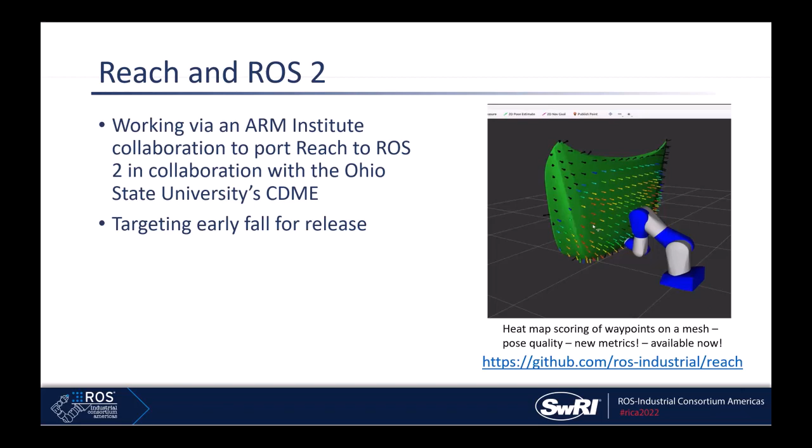So stay tuned. Another exciting tidbit of news is for those who are familiar with robotic blending over the years, we're excited to say we've got another round of robotic blending going, milestone 5. Just kicked off March 28th. We will be hosting a couple different integration events. The cool thing is we're going to be taking the prior repo, Godel that's referenced, pulling all the goodness from Godel, modernizing that whole scan and plan implementation, merging with the scan and plan workshop, to create something more contemporary and new in ROS 2, and ideally we'll have a couple replications left behind. So a number of our different collaboration partners will have the latest and greatest in how to execute scan and plan processes based on this.

Shout out to Steel Founders Society of America. They're the champions and primary funders of this initiative. But we have a number of different members, universities, and in-kind collaboration partners involved. Pretty exciting, happy to see that, and the benefits to the overall number of different repositories in the ROS industrial ecosystem. So we're pretty excited to see that. That's kind of the latest relative to collaborative developments and some different events and activities coming on.

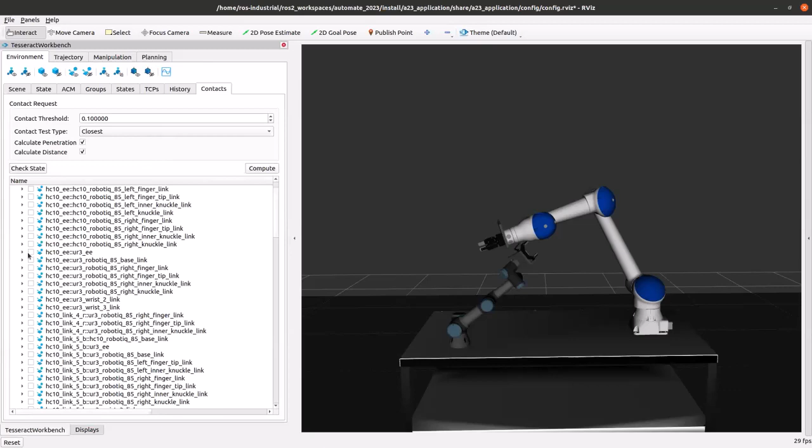And then one of the cool things you can do is actually do a contact check. So you can use the Tesseract contact checker live, and then you can see all the contact results. So I can see like between the HC10 and the UR3, and you click on it, it actually shows you the contact, and if you drag this out, it'll actually tell you how far apart they are.

This can be super useful for debugging various things. I was just using this for debugging some of my allowed collision stuff. But anyway, yeah, and then you can look at the collision objects like you would expect, all of the bounding boxes of things, and then all of the frames. This is all just in Tesseract, it's not using the TF frames or anything like that.

And then another really cool feature is the trajectory viewer. So you can store up a bunch of trajectories, and then actually -- whoops, I gotta turn this on.

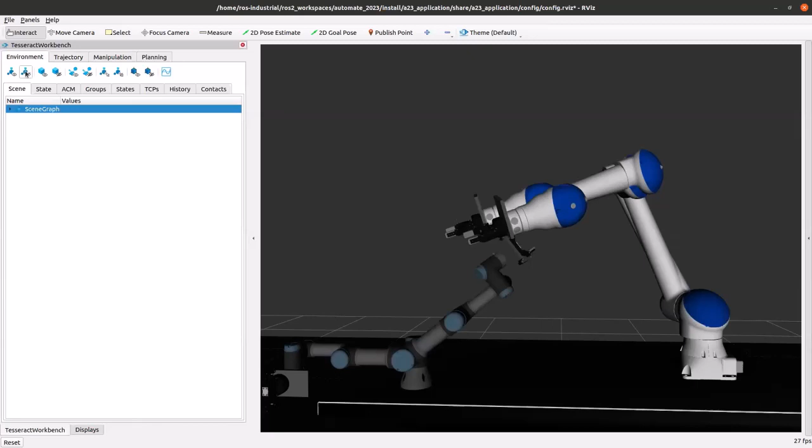So I'll hide the previous environment, and then you can visualize and watch the trajectory move around. In this case, we see the HC10 planning around the UR right there.

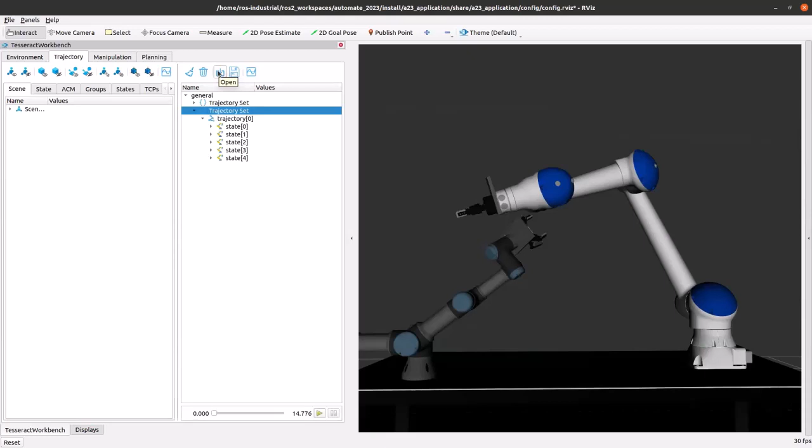A nice handy thing you can do is go in and look at each individual state, all the joint positions, joint names, positions, velocities, timestamp. You can also view a plot of it, showing position, velocity, and acceleration over time.

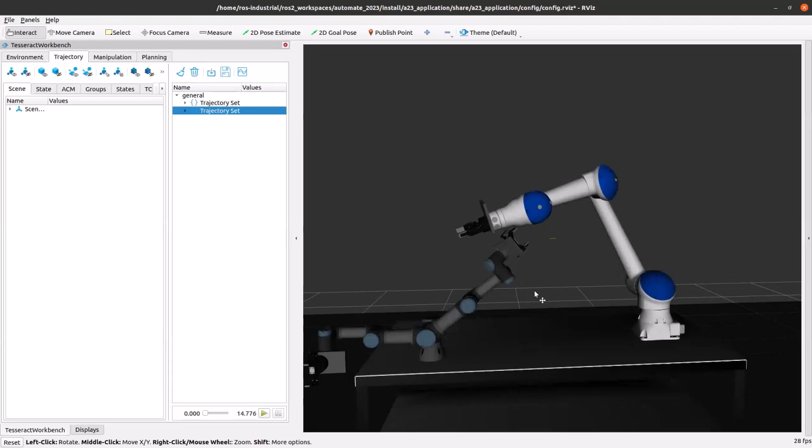And then you can save these trajectories and load in other trajectories. In theory, you can have this Tesseract environment pulled up, and as long as you know about the URDF, you could load in a trajectory from somewhere else. I could save off this trajectory and send it to somebody else working on this project, and they can load it up and step through it all the same.

Right now those files are pretty big because they contain all of the Tesseract environment history, and it's all just serialized. So they can be pretty big files, but they're pretty handy.

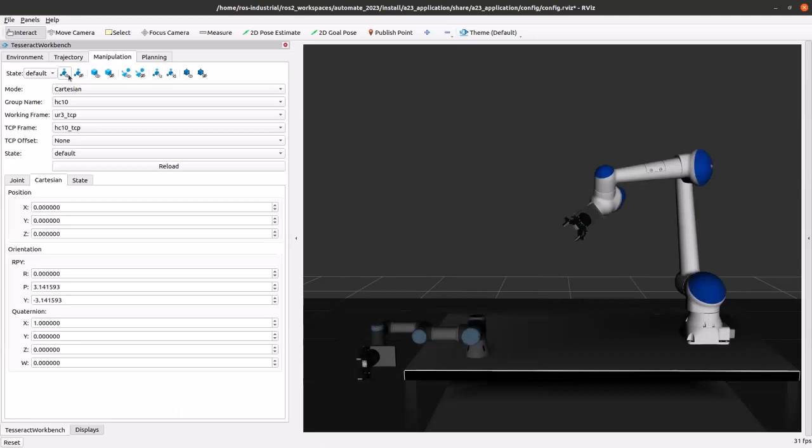There's also this manipulation widget, which you can use to move the different robots around, in Cartesian or joint mode, specifying which manipulator group you want to use and your working frame. In this instance, I specified the working frame as the UR3 TCP, which is right in the center here, and my TCP frame as the HC10 TCP, also right in the center. I set the position to be exactly on top of it with a rotation around it.

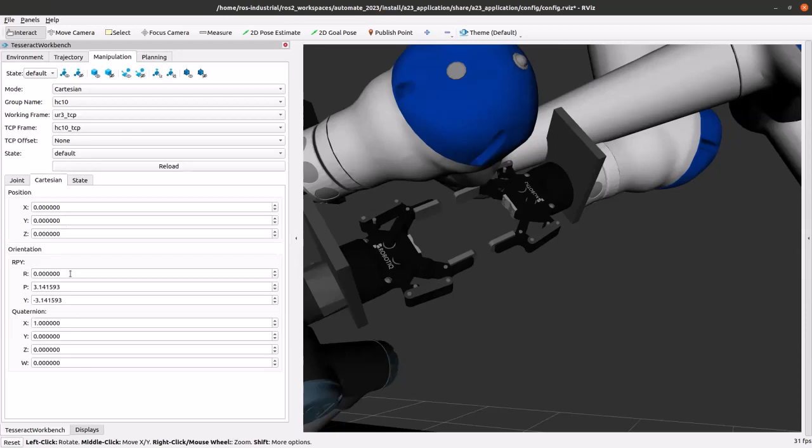But I could make this working frame anything, make it the table, and then change the Z value to be 0.2, and it shows you the IK solution, which can be helpful for debugging things. But yeah, in general, that's the Tesseract widget for those unfamiliar.

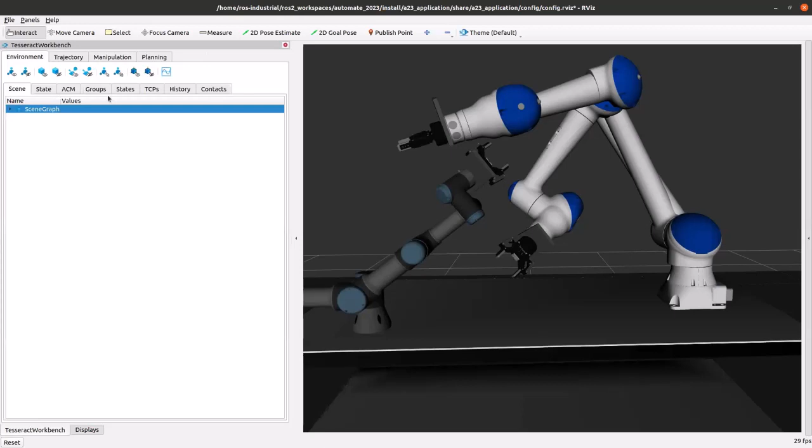And yeah, this is all available in ROS-2 now. I will say that there does seem to be some rare, but it does happen, crashing right now. Some of the latest updates in the Tesseract Qt backend might be contributing to this. We're still working through that, but I've been using it pretty reliably without too much issue.

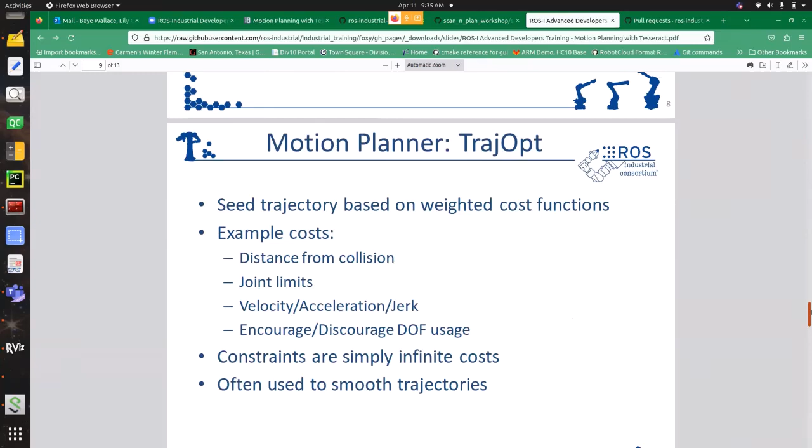We're going to go through this content, review some of the types of why we're going to do this sort of pipeline construction. Then we'll build a task flow like this, where we're just streamlining and adding additional constraints to a free space motion in order to make it have clean and consistent behavior.

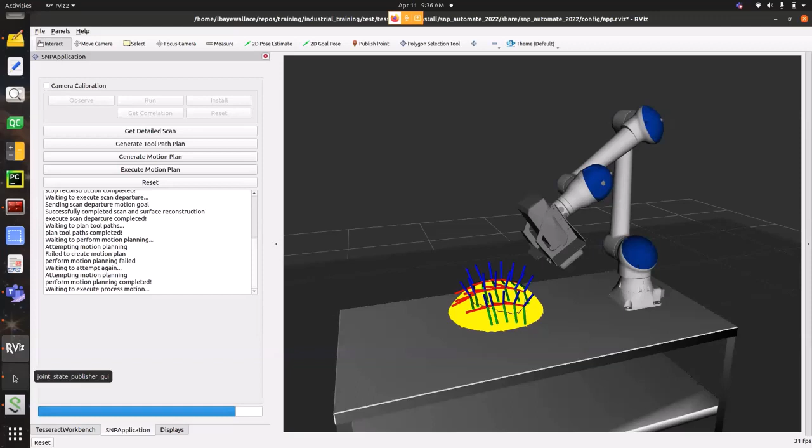I can go ahead and show you real quick what this is going to look like for us when you're getting towards the tail end of running through this demonstration. We've got this lovely setup. This is really comparable, again, if you saw us at Automate last year. You saw this HC10 on a table.

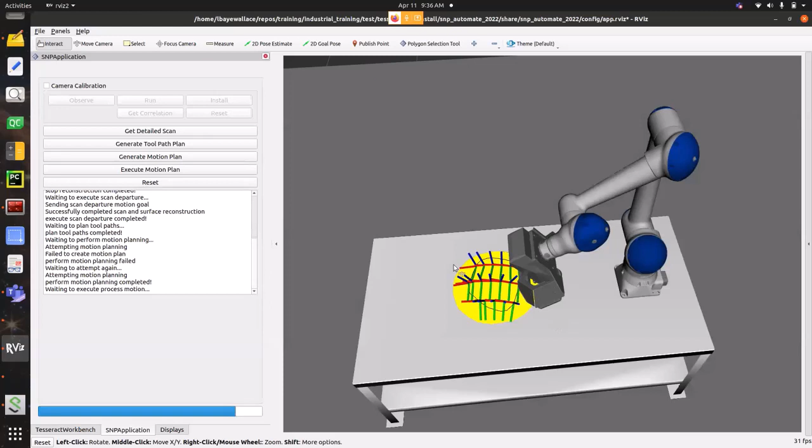In this case, we had a number of different arbitrary surfaces on which you could draw something. It had a whiteboard covering to it. And then this system, well, you could select where to erase. We selected in particular for this just our RViz simulation, the walk shape for you to go ahead and look over.

Going through these buttons with a couple of additional UIs to help you select the mesh modifier you want, the parameters of that mesh modifier, your direction generator, particulars of your raster planning, and then some additional toolpath modifiers like the direction in which it's going to follow your rasters and any sort of smoothing. You can expand these drop downs and take a deeper look into the potential options you have.

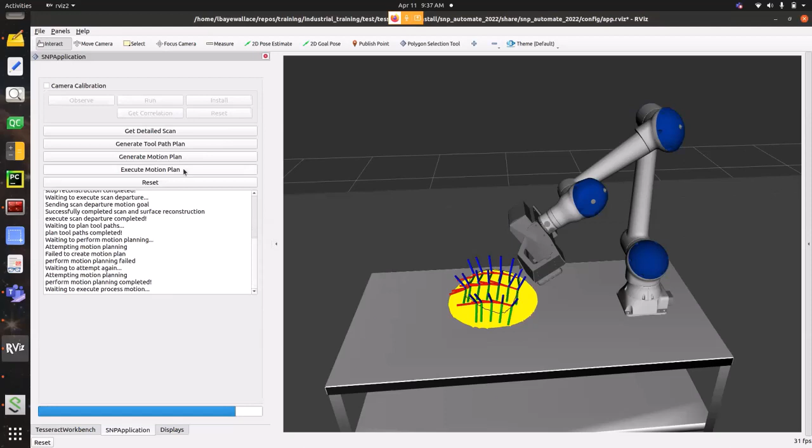This will allow you to go through the motions and take a look at actually executing this process motion across the surface. I don't know why it decided to just not do that. But yeah, also if it gets itself stuck and you need to move it out of a singularity, you can go ahead and do that.